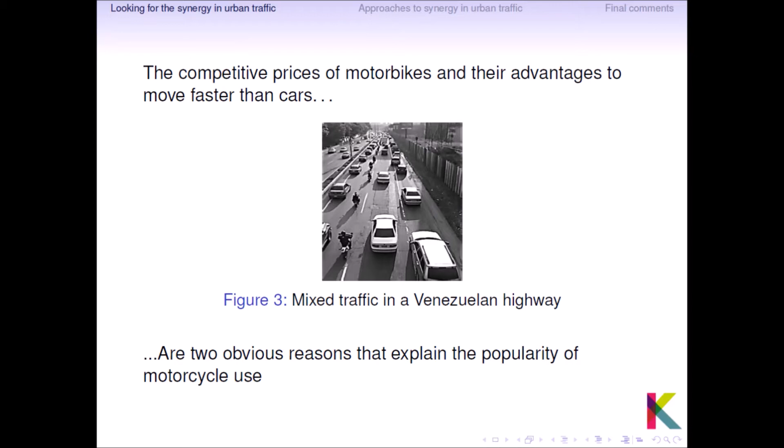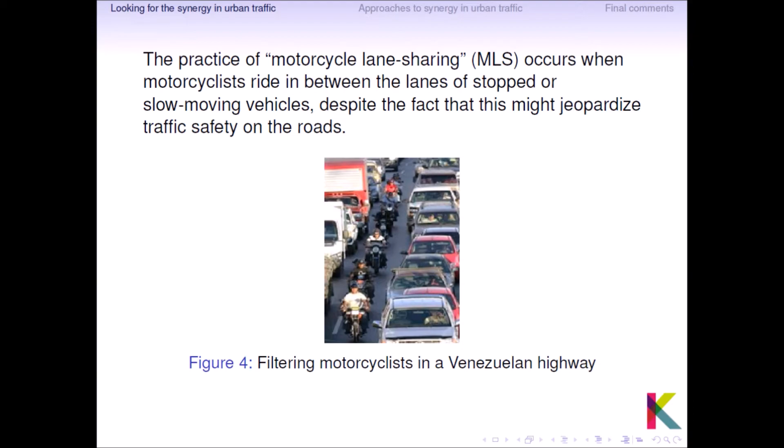It must be noticed that the competitive prices of motorbikes and their advantages to move faster than cars in urban traffic are two obvious reasons that explain the popularity of motorcycle use. And because of these reasons, the practice of motorcycle lane sharing is now well known in larger cities. This practice occurs when motorcyclists ride in between the lanes of stopped or slow-moving vehicles, despite the fact that it might jeopardize traffic safety on the road.

This practice of mobilization, induced by vehicular density and economic factors, presents a behavioral interaction between motorists and motorcyclists who act as elementary components of a phenomenon which has its own peculiarities at both the macroscopic and the microscopic scale of analysis. But how can we study this phenomenon?

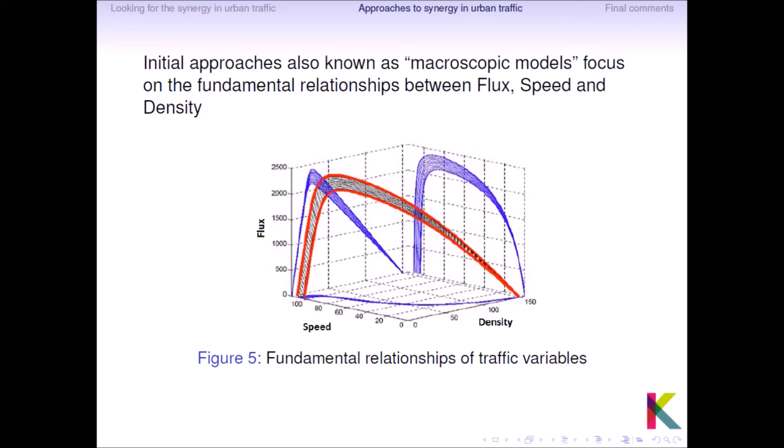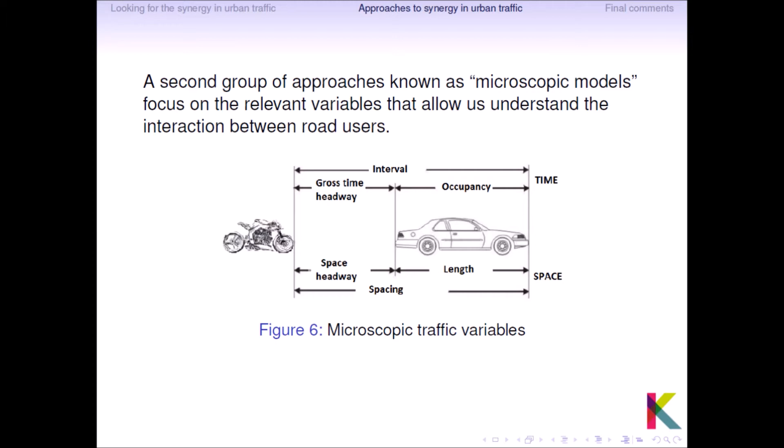Well, initial approaches, also known as macroscopic models, focus on the fundamental relationships between flux, speed, and density, as we can see in this picture, and the relationships between these metrics. A second group of approaches, known as microscopic models, focus on the relevant variables that allow us to understand the interaction between road users by analyzing the specific individual behavior of each road user.

Despite the adequacy of microscopic approaches to analyze the interaction between road users, the observation of these variables in real traffic demands a lot of instrumentation in natural settings, which can be costly. And here lies the utility of agent-based simulations as handy research resources. An intelligent agent is a software-hardware entity that resembles some physical or biological entities by mimicking their behavior according to some rules predefined by a system modeler.

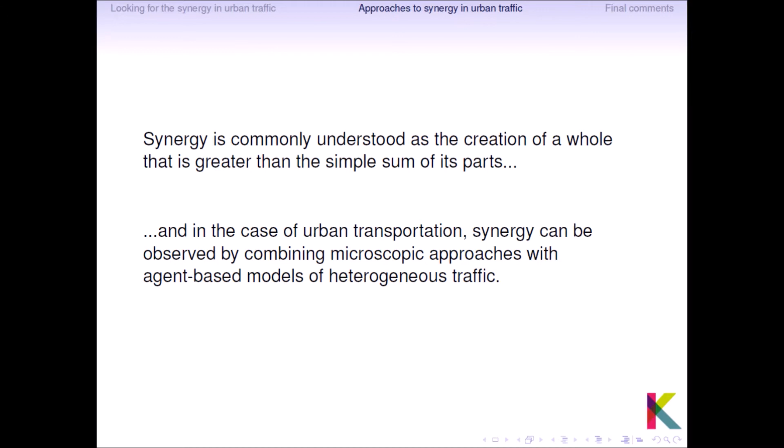And what does this have to do with synergy? Synergy is commonly understood as the creation of a whole that is greater than the simple sum of its parts. And in the case of urban transportation, synergy can be observed by combining microscopic approaches with agent-based models of heterogeneous traffic. The heterogeneous traffic is characterized by the interaction of motorcycles and four-wheeled vehicles driving without lane discipline. The absence of lane discipline consists in the vehicular movement that is influenced by the presence of vehicles in the front as well as on the sides.

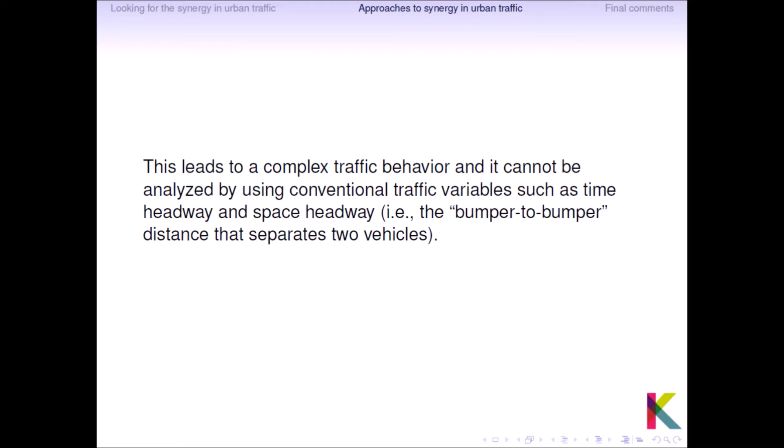And this leads to a complex traffic behavior, and it cannot be analyzed by using conventional traffic variables such as time headway and space headway, that is, the bumper-to-bumper distance that separates two vehicles. So we need another set of variables that allows us to understand synergy between road users in traffic. Here stands the importance of the not well-known concept of area occupancy.

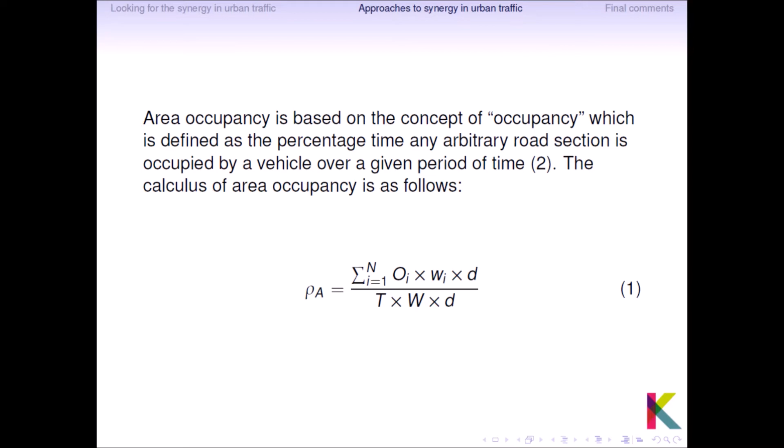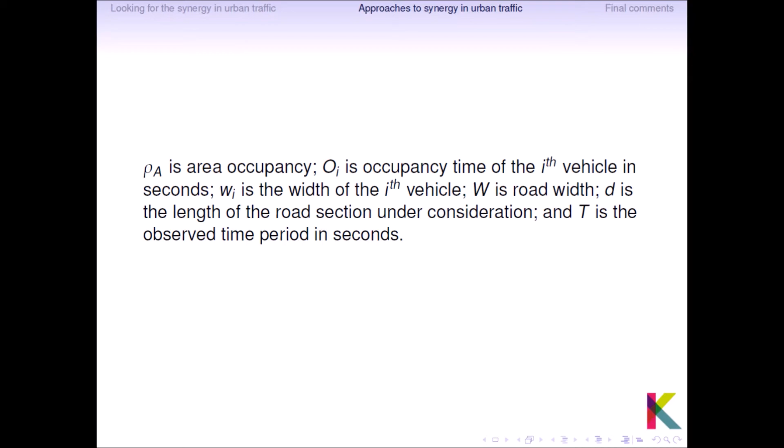Area occupancy is based on the concept of occupancy, which is defined as the percentage time any arbitrary road section is occupied by a vehicle over a given period of time. The calculus of area occupancy is as follows. Area occupancy is represented with the lowercase Greek letter rho (ρ). The capital letter O stands for occupancy. The lowercase letter w represents the width of the vehicle, the uppercase letter W is the road width, lowercase d is the length of the road section under consideration, and the uppercase T is the observed time period in seconds.

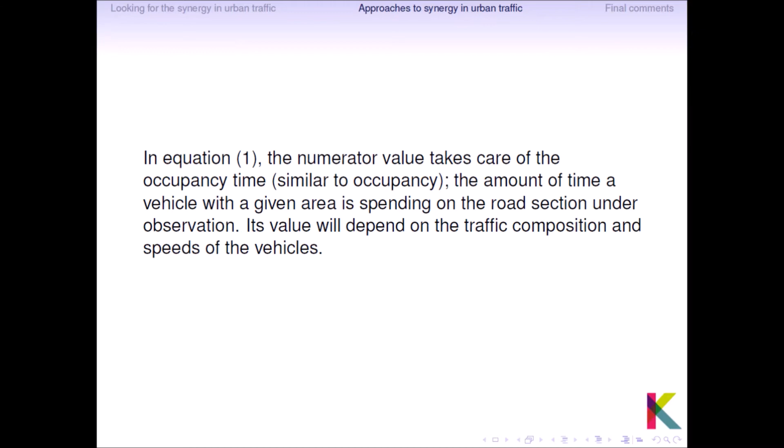In this equation, the numerator value takes care of the occupancy time, similar to occupancy, the amount of time a vehicle with a given area is spending on the road section under observation. Its value will depend obviously on the traffic composition and speeds of the vehicles. Now, since motorcyclists have a faster occupancy time due to their possibility of percolating through stopped or slow-moving vehicles, the efforts of measuring heterogeneous traffic flow present us an interesting opportunity to examine the synergy between road users.

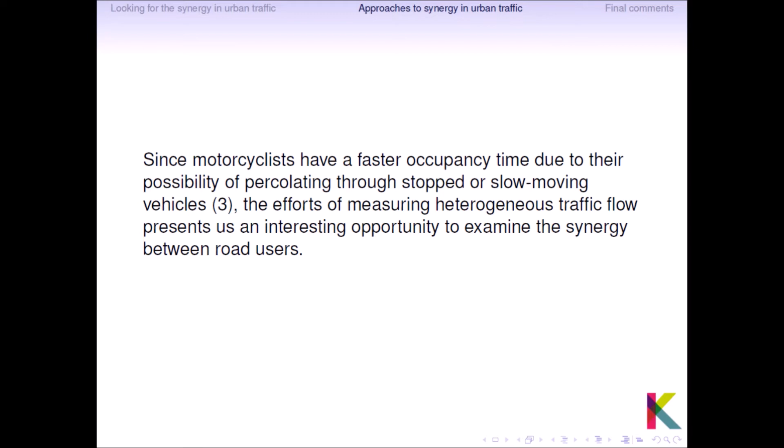And where is the empirical evidence? Well, Correa developed an agent-based model to estimate the quantitative impact of motorcycle lane sharing on motorist behavior. In this model, three agents are comprised: the road, the motorist, and the motorcyclist. These agents interact in a non-toroid two-dimensional virtual environment represented as a map with a coordinate system whose origin lies in the upper left corner.

The physical dimensions of this map were 40 meters of height and 400 meters of width. The physical dimensions of the road were equivalent to a two-lane avenue with a length of 400 meters. The width of each lane was fixed to 4 meters. The total length of a single lane is constituted by 100 cells of 4 meters square. This layout is depicted in this figure.

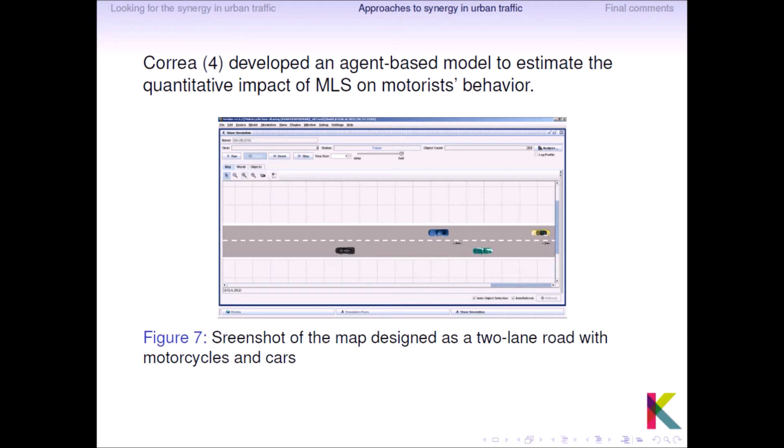In this model, motorcyclists choose a lane to drive on and then do not attempt to change the chosen lane. Motorcyclists drive at speeds that are higher than those of the motorist, which is a common fact which has been already validated in previous studies.

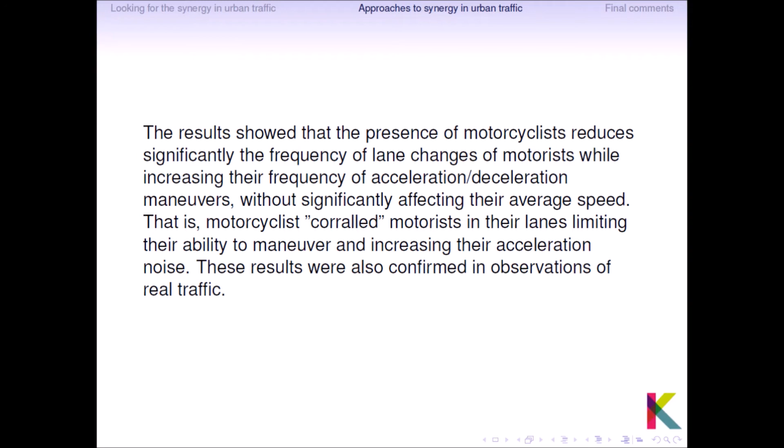The results showed that the presence of motorcyclists reduces significantly the frequency of lane changes of motorists while increasing their frequency of acceleration-deceleration maneuvers, without significantly affecting their average speed. That is, motorcyclists corral motorists in their lanes, limiting their ability to maneuver and increasing their acceleration noise. These results were also confirmed in observations of real traffic.

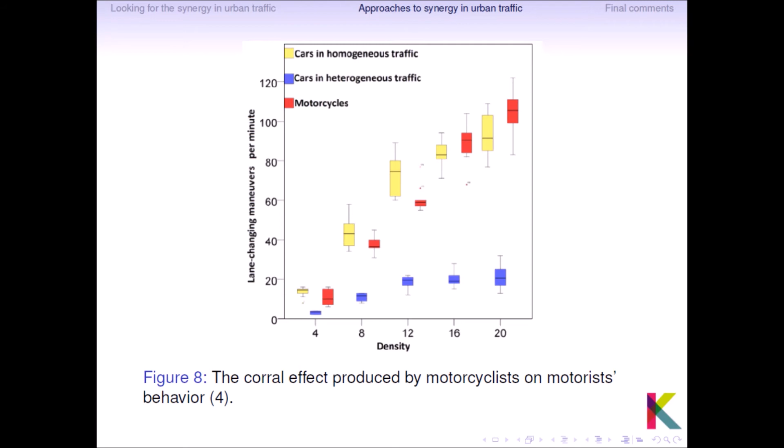In this picture, we see the statistical differences between lane-changing maneuvers of motorists interacting with and without motorcyclists. Yellow boxes represent the maneuvers of motorists in homogeneous traffic, namely when they do not have to interact with motorcyclists. Blue boxes represent their maneuvers when they do. The gap between these boxes shows us the corral effect produced by motorcyclists.

Another interesting evidence was obtained in India. Mallikarjuna and Rao estimated the heterogeneous traffic flows by using a sophisticated video analysis software to collect traffic volumes and composition by automatically identifying types of vehicles on the National Highway 1 connecting New Delhi and Amritsar.

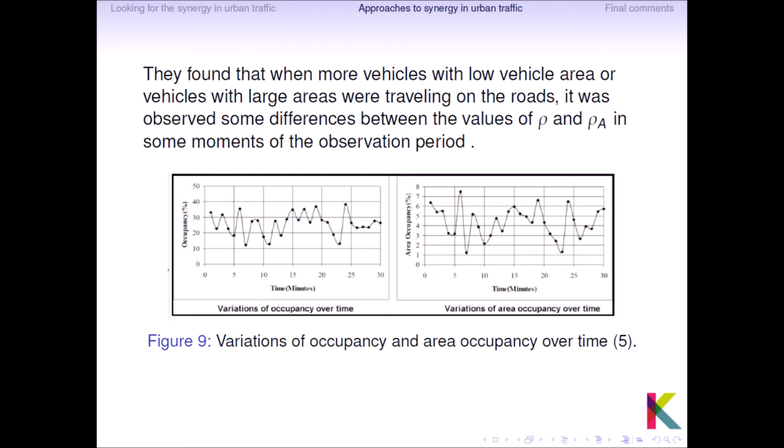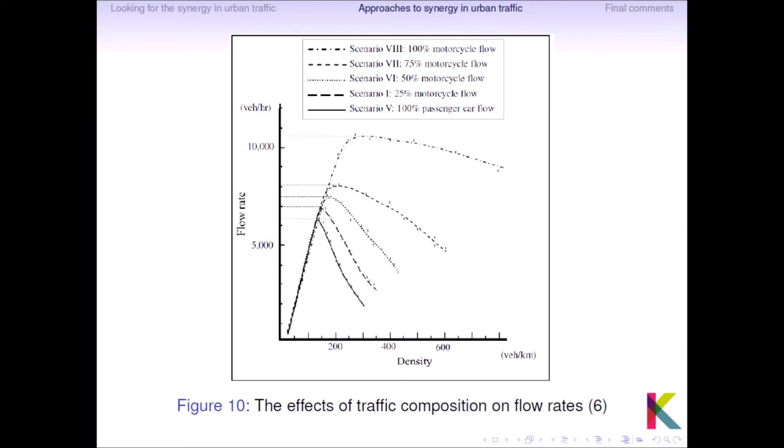We finally have another study about the effect of traffic composition on flows. As part of his doctoral dissertation, Lee observed that the worst traffic corresponded to the scenario of 100% of cars, while the best one corresponded to the scenario of 100% motorbikes, and the different mixed compositions occupied an intermediate position between these two homogeneous traffic.

As final comments, we have to say that the synergy in urban traffic consists in the rise of the road capacity because motorcyclists can exploit the road space by filtering through a slow-moving flow, using the clearance between two parallel cars or the possibility to weave in and out of a stationary flow via the safety margins between vehicles. However, due to the difficulties associated with measuring heterogeneous traffic flow in natural settings, traffic management usually relies on the assumption of a homogeneous traffic.

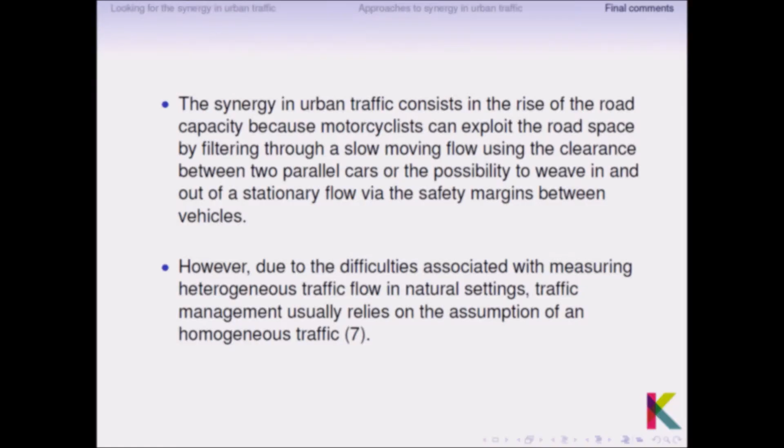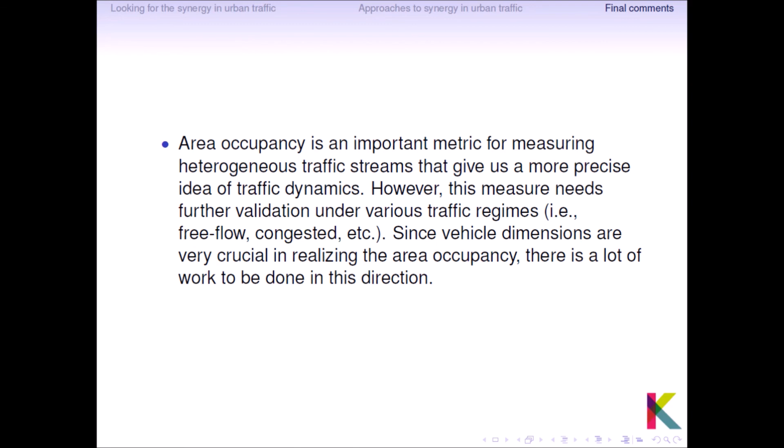Here we have seen the importance of area occupancy as a metric for measuring heterogeneous traffic streams that give us a more precise idea of traffic dynamics. However, this measure needs further validation under various traffic regimes, like free flow or congested traffic. Since vehicle dimensions are very crucial in realizing the area occupancy, there's a lot of work to be done in this direction. In agent-based simulations, we have seen that the overall traffic flow improved when the composition is not completely homogeneous.

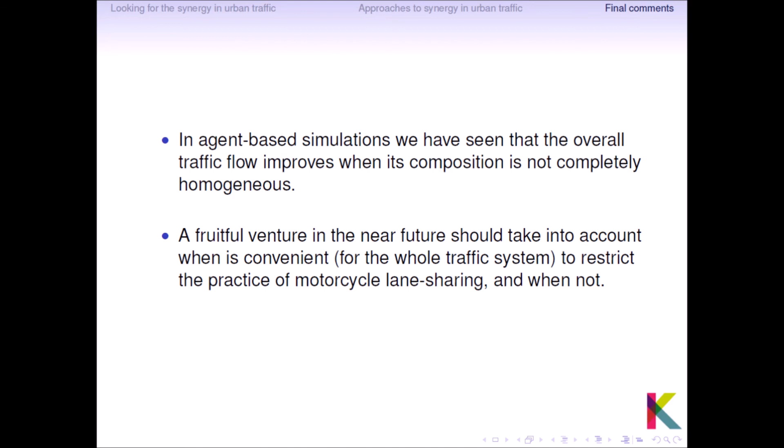A fruitful venture in the near future should take into account when it is convenient to restrict the practice of motorcycle lane sharing and when not. Another fertile orientation is to examine under what specific conditions this synergy works, namely, to examine the effect of lane width, number of lanes, etc. The future of traffic management depends on our knowledge about the interaction of road users, which clearly welcomes the approaches of complexity sciences.